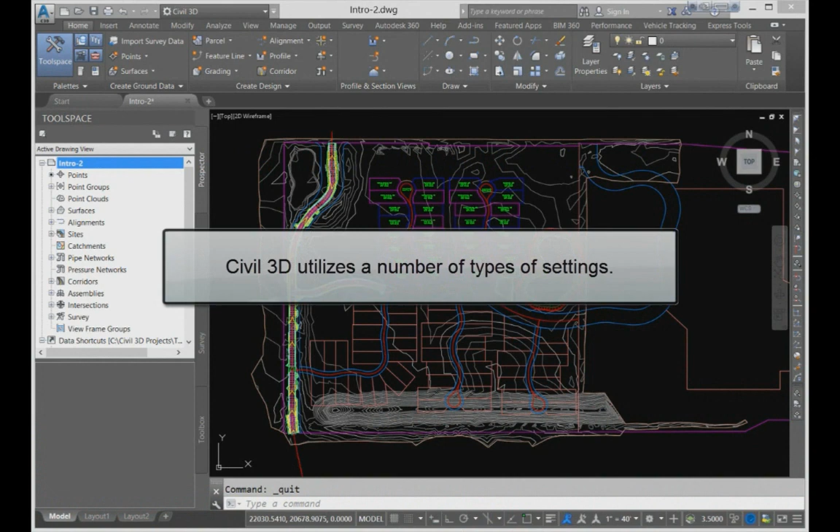Civil 3D utilizes a number of types of settings. The drawing settings control the entire drawing. The object settings control the settings for an entire object, such as a surface or profile. And the command settings apply to just one specific command within Civil 3D.

Start by looking at the drawing settings. In the Toolspace, Settings tab, at the top you can see your drawing name is in bold. It is important to remember that the active drawing name must be in bold. Bold designates that this is the current active drawing on your screen. If the drawing name is dimmed, that indicates it is a drawing that you opened, but it is not the current drawing in your drawing window.

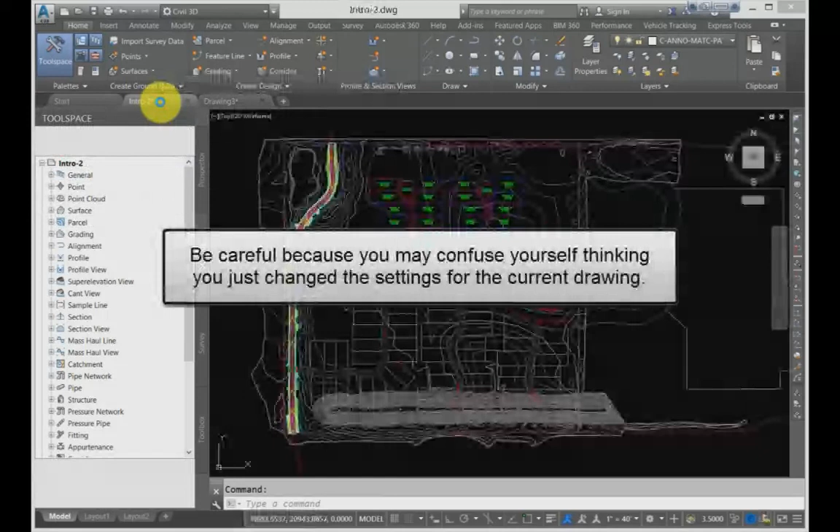You can change the drawing settings for an opened but not active drawing by right-clicking the dimmed drawing name. But be careful because you may confuse yourself thinking you just changed the settings for the current drawing. So make sure the drawing name is in bold. If not, then scroll up in the Settings tab until you find the bold named drawing.

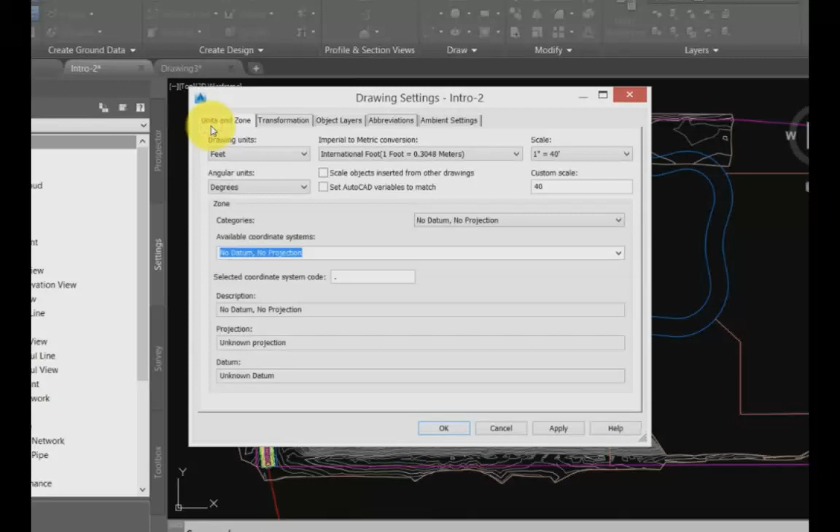Right-click the drawing name and select Edit Drawing Settings. The Drawing Settings dialog box opens. There are 5 tabs in this dialog box: Units and Zone, Transformation, Object Layers, Abbreviation, and Ambient Settings. Start by clicking the Units and Zone tab.

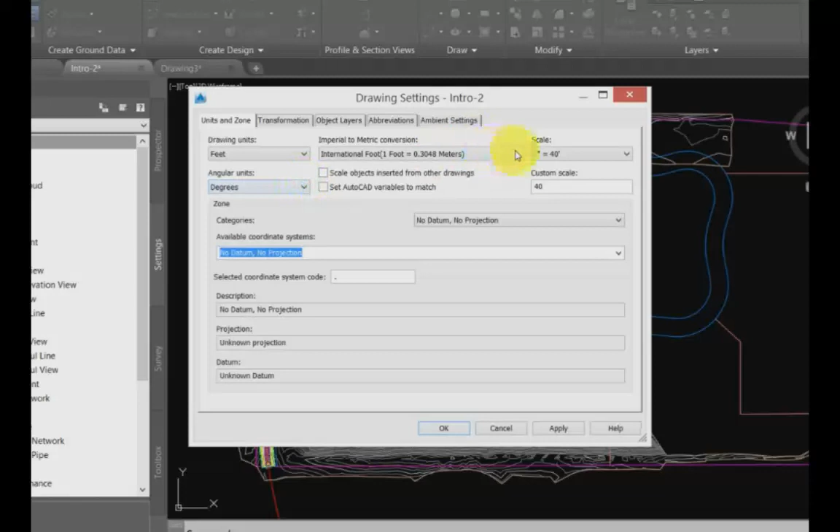In the Units and Zone tab, you can set the drawing model units to either feet or meters, and you can also set the angular units. If your drawing model is set to feet, you can choose whether it is the International Foot or the US Survey Foot. Be careful here, because sometimes you need survey foot, and sometimes you do not.

Ask your surveyor what they use to be sure you have set the correct units for your drawing. Or you can look at their survey drawing settings to see what they set and match their settings. Best practice is to get the zone information from them as well, so you can match that too.

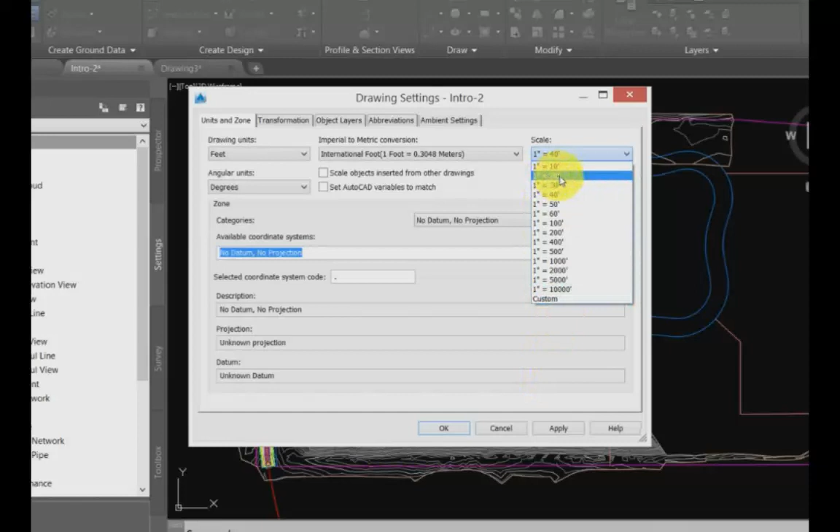Along with the unit settings, you also have an option to set the drawing scale in this dialog box. You can also find the same exact setting in the status bar, where it is called the annotation scale. Change the drawing scale in this dialog box from 40 to 20 and then click Apply. Now look at the status bar and you can see that the annotation scale has changed to match what you set in the drawing settings dialog box.

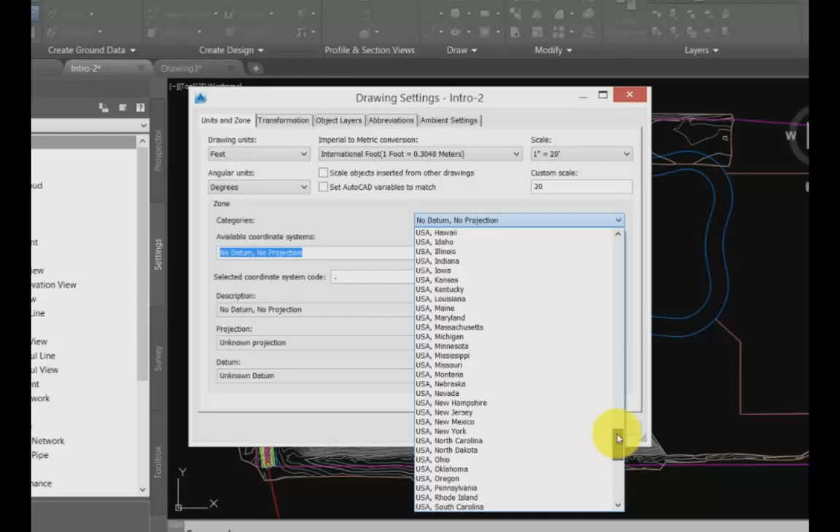Back in the Units and Zone tab, under Zone, you can also set the coordinate system for your drawing. Here you have a list of thousands of coordinate systems from around the world. When you select a category, for instance, one of the USA state categories, you'll see a large list of coordinate systems inside each of those categories. Expand the categories drop-down and find the USA Mississippi zone. Then, under Available Coordinate Systems, select the NAD 83 East Zone US Foot.

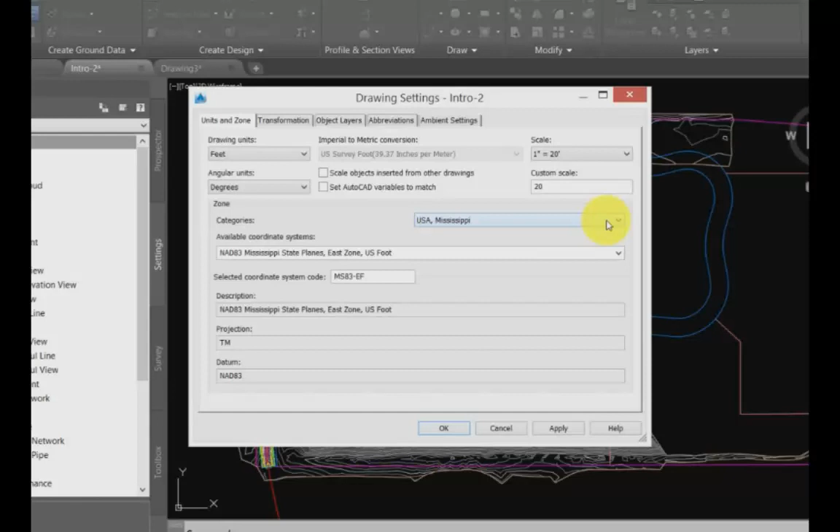Click Apply, and now you have set your drawing zone to the east part of Mississippi and NAD 83 US Foot. Most of the time, you'll be working in NAD 83 in the US. In other parts of the world, you would be working in metric units, and whichever zone the country may be in. If you have no idea what the coordinate system of your drawing is, leave it set to no datum, no projection, until you find out what the zone should be.

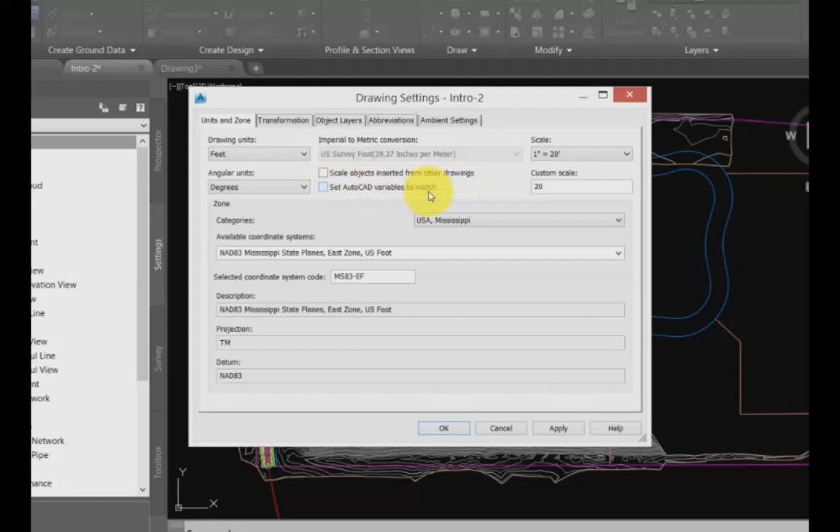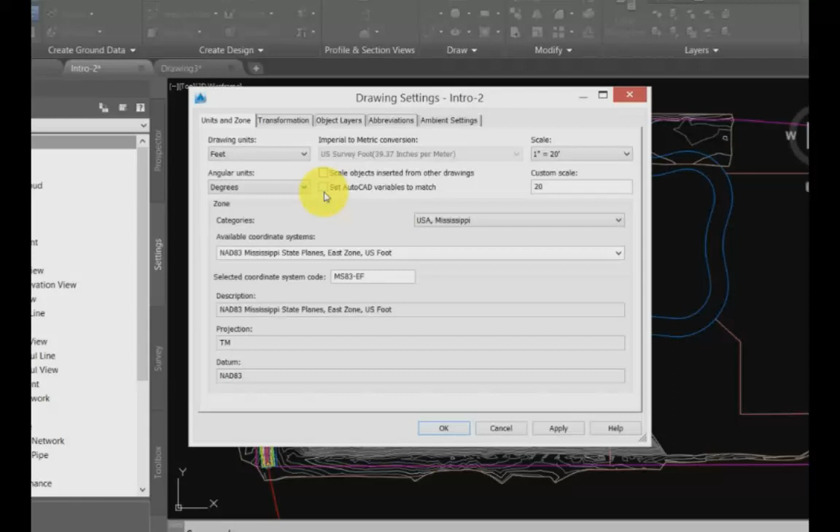Lastly, on the Units and Zone tab are the options to scale objects inserted from other drawings and set AutoCAD variables to match. If you enable these, they can interfere with your insert commands for both blocks and XREFs. If you need to always scale a block 12 times up or down, or by some other common scale factor, then selecting Scale Objects Inserted from Other Drawings is a good option. Otherwise, leave them deselected.

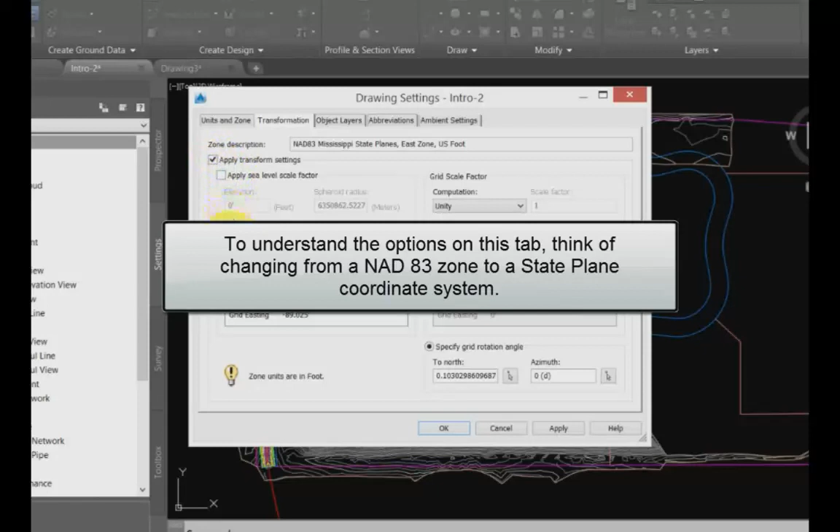On the Transformation tab, if you do not have a zone set, then none of these options are selectable. Until you set a zone in the Units and Zone tab, you cannot set any of the transformation settings. Since you have a zone, the options in this tab are available. To understand the options on this tab, think of changing from a NAD 83 zone to a state plane coordinate system. This is what this tab is for.

Sometimes the end result of your project must be in state plane coordinate system, but the survey that you received is in NAD 83. This is the area of the drawing settings where you could manipulate your drawing without having to physically move, rotate, and scale everything so that it changes from NAD 83 to the state plane coordinate system for your area.

When you click Apply Transformation Settings, you are given the option to make adjustments for the datum or to apply a grid scale factor to your complete drawing. For example, you may need to rotate your drawing around a benchmark to get it to line up with what your client needs. In that case, you would use the reference point options to specify a reference point for that

transformation. However, before you use these options, usually your surveyor can give you the information you need to convert your project to state plane coordinates. Take that information that they give you and enter it here.

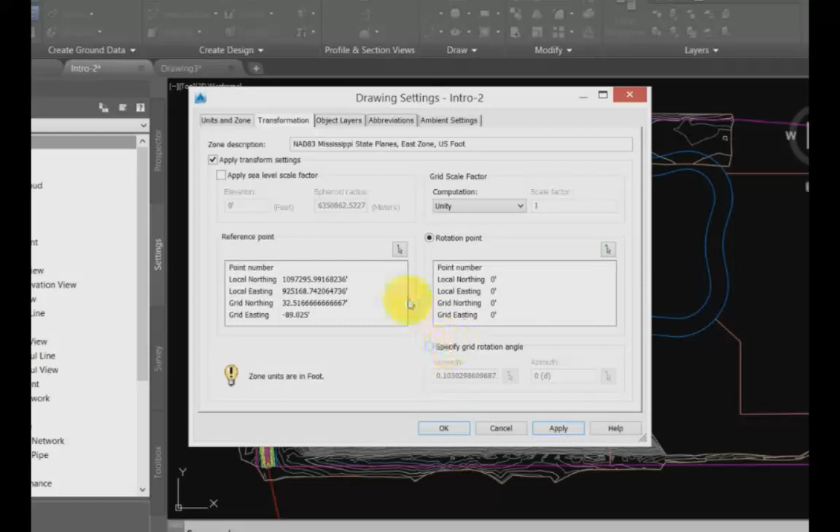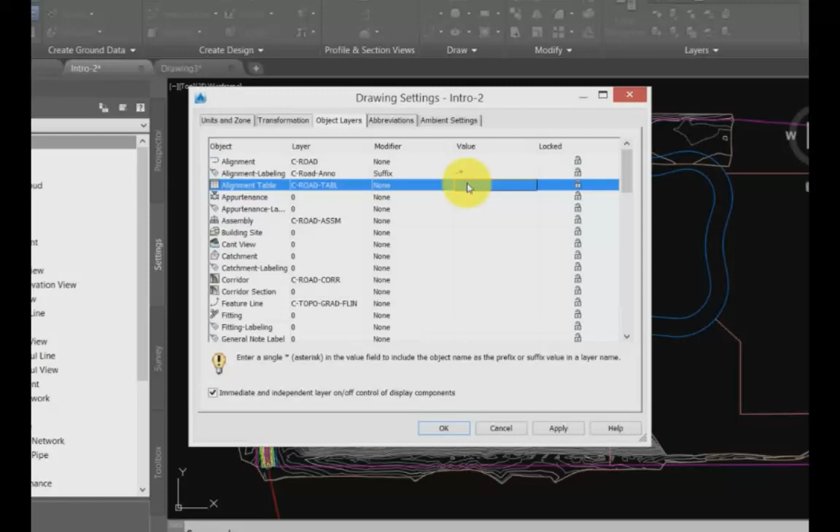On the Object Layers tab, you can set the default layer that objects are created on. By adding a modifier to the prefix or suffix of the layer, you can place each object on its own individual layer. For ease of object management, it is recommended that you use set modifiers of -* or *- on the following layers: alignment, profile, tin surface, and tin surface - labeling.

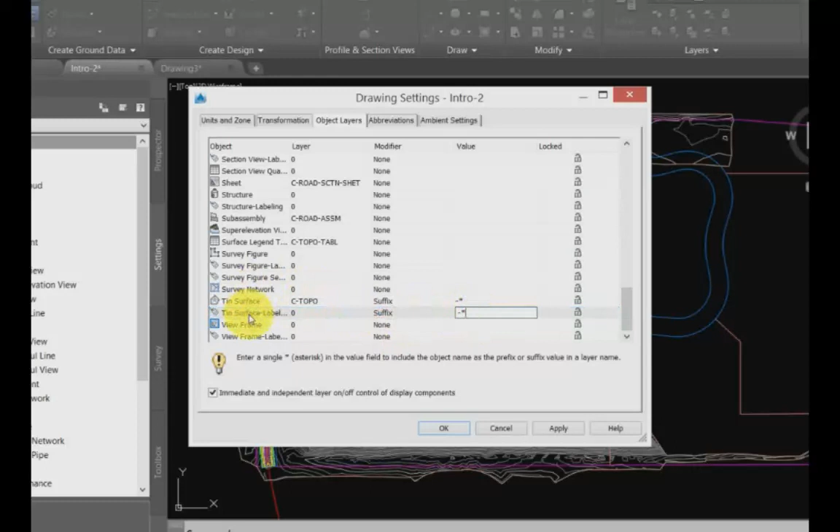The asterisk option is the wildcard. By adding that modifier, whatever name you give the object is what will be placed in the wildcard spot of the layer name. For example, if the alignments are set to the C-road layer, and then you select to add a modifier of a suffix of -*, when you create your alignment and call it Street A, then the layer it will go on is

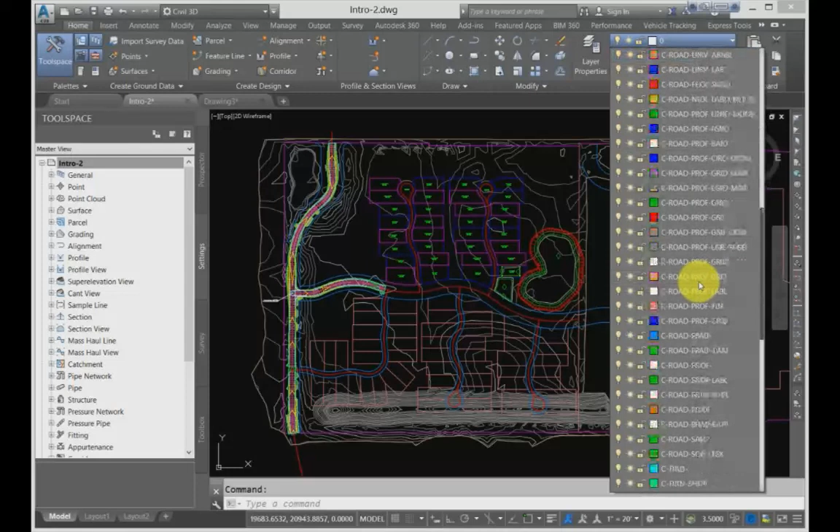C-road-Street A. Lastly, in this tab, you should always enable the immediate and independent layer on-off control of display components at the bottom. This gives you both object layer and style layer control of your objects when you are XREFing this drawing into another drawing.

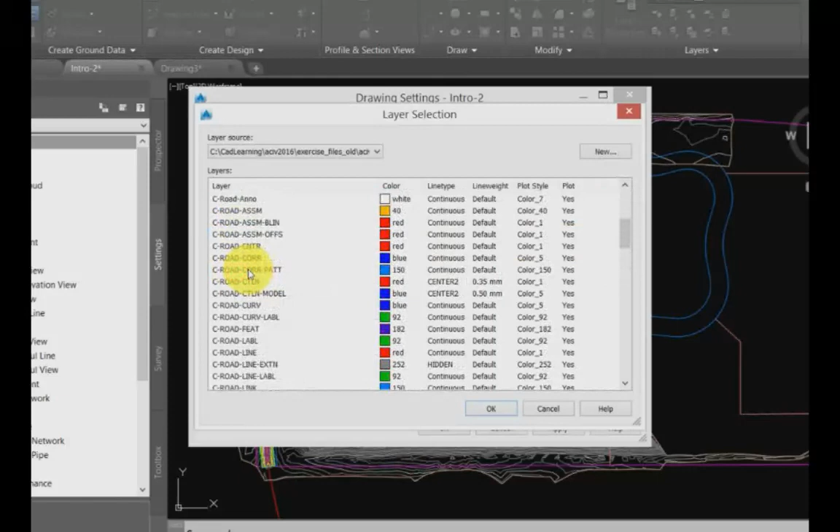Also on the Object Layers tab, you can change the base layer name for any object by simply clicking the current layer name and then selecting the layer that is currently in the drawing from the Layer Selection dialog box. If the layer you need is not already created, then you can click New in the Layer Selection dialog box to create a new layer.

By setting all of your layers on this tab for all the initial object placements, they become part of a template. Then you can save this drawing as a template file, and what you set here will always be set this way every time you open it.

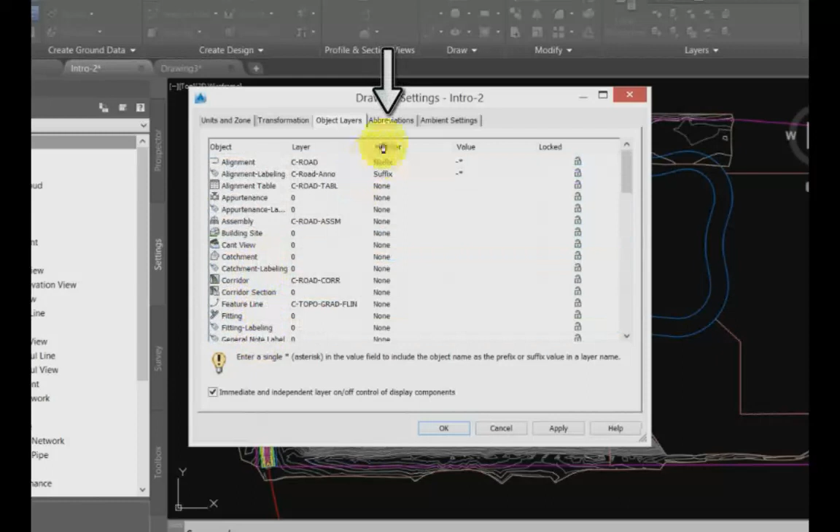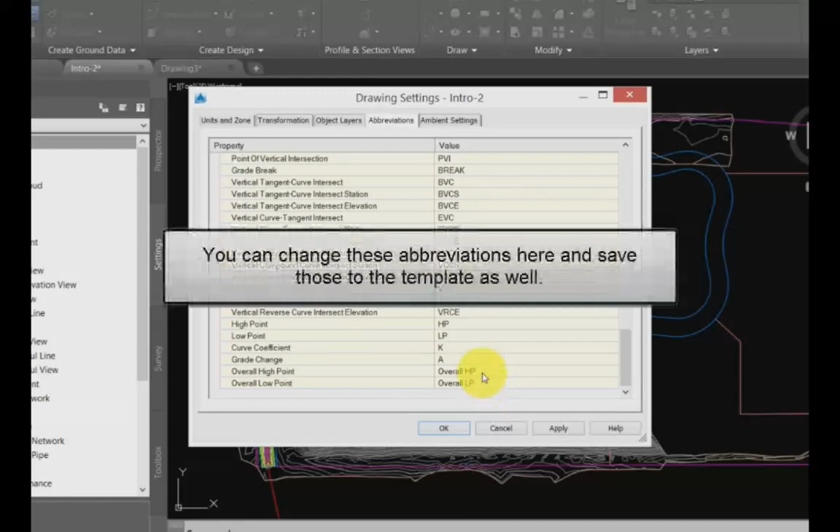On the Abbreviations tab, all of the abbreviations found in the reports that reference alignment and profile data can be changed. You can set any of the abbreviations that Civil 3D will use. However, the defaults here are probably appropriate. If you have any special needs for the particular area in which you are working, you can change these abbreviations here and save those to the template as well.

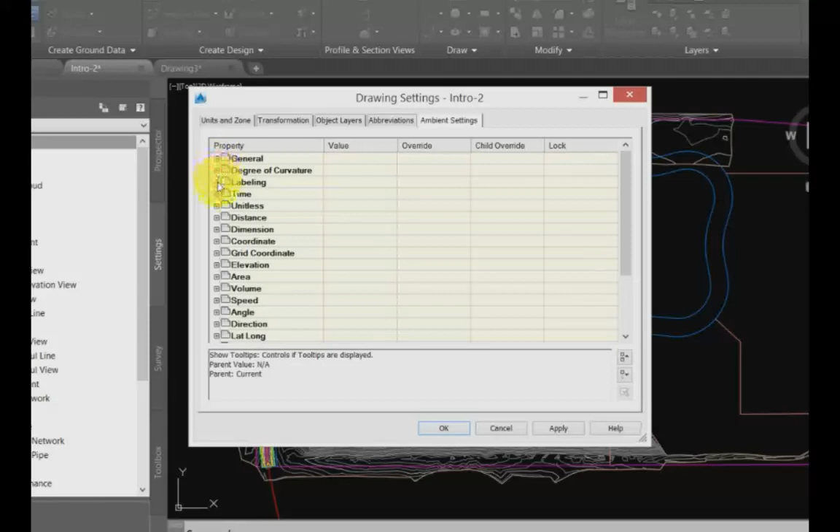Lastly is the Ambient Settings tab. This is where you can set whether or not the event viewer displays and whether you can turn off your tooltips, as well as many other default drawing settings. You can also set specific settings for things like distance and how that is displayed in the drawing. For instance, the units can be set and you can see all the different unit options.

Also, the decimal precision for display can be set, as well as rounding and how the negative sign will be handled. You can change any one of these values. Change the decimal precision to 4 decimal places. Once this is changed, it is applied to the entire drawing unless there is an override selected here, as you can see with this child override arrow.

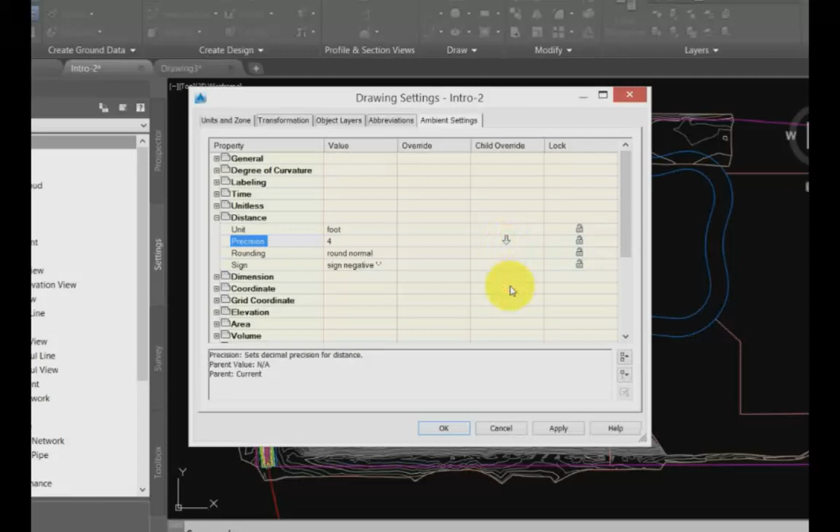You could clear this child override by clicking this icon, which would force the value of 4 decimal places of precision onto all of the distances within the drawing. Click OK to accept the changes to your drawing, or click Cancel to close this dialog box.

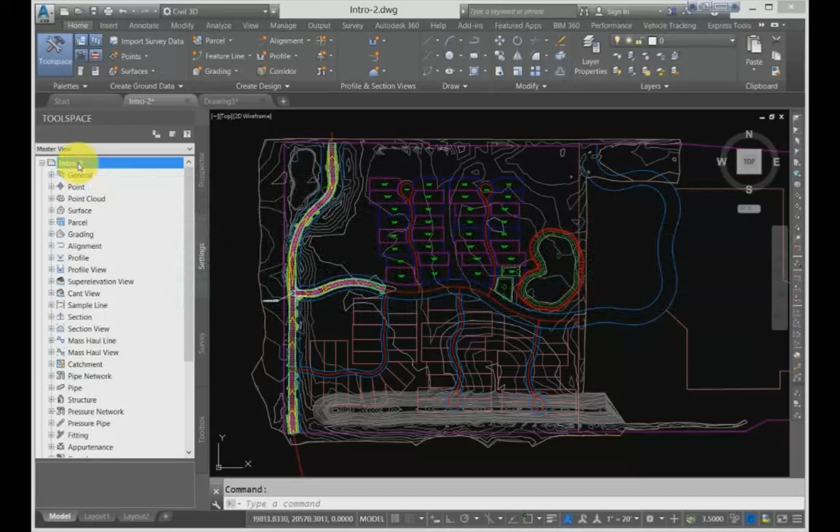After spending some time making changes in the drawing settings dialog box, you can choose to make a template so that you can use these settings over and over. Start with the blank template that is given to you by Autodesk and not the example files for this course. To do that, save the changed drawing as a template DWT file, then map your options for templates to where this new template file is saved.

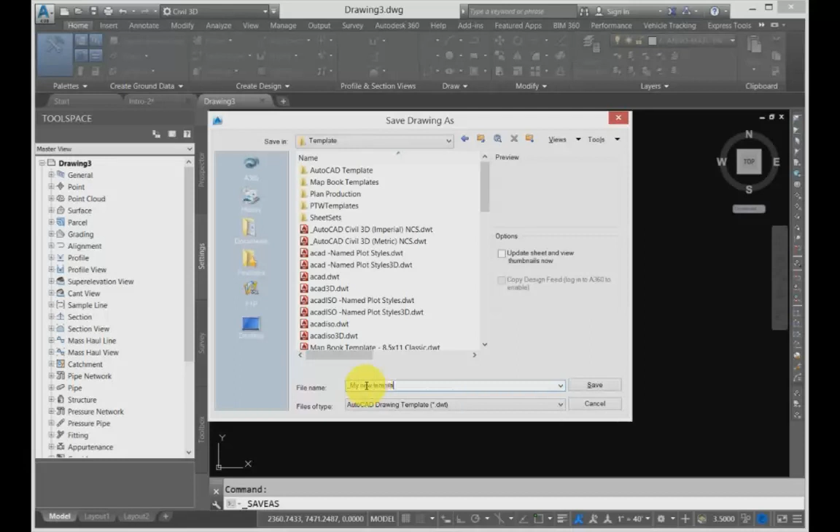That way, every time you click New for a new drawing, the updated template file with the correct drawing settings is always opened. It is good practice to create a usable template for all of your projects. Spend some time and configure your template drawing and the drawing settings to what would work best for you and your company. As you can see, Civil 3D has many in-depth controls for data.